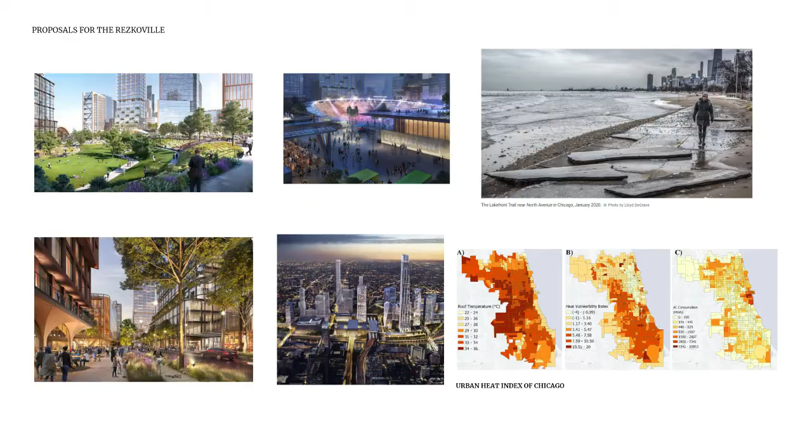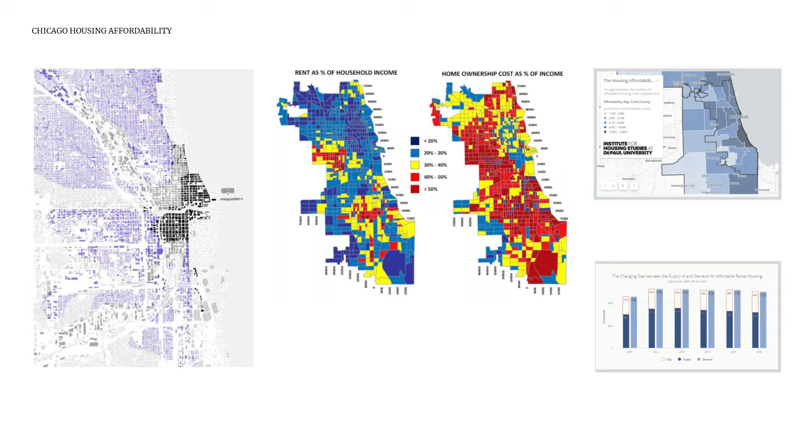The affordability gap is the gap between demand and supply of affordable houses, in which case the demand is always higher than the supply. The government says housing is affordable if a family spends no more than 30% of their income to live there. This threshold is called affordable rent burden, but 30% of 1 million is very different from 30% of 20,000.

If we line up all the families in a place by income, the median family income is what the family right in the middle of the income distribution earns. By definition, half the families earn more and half the families earn less than the median income.

Now what interested me was why not create a circular program where the solution is sustainable, affordable, and livable, and how can all these three come together?

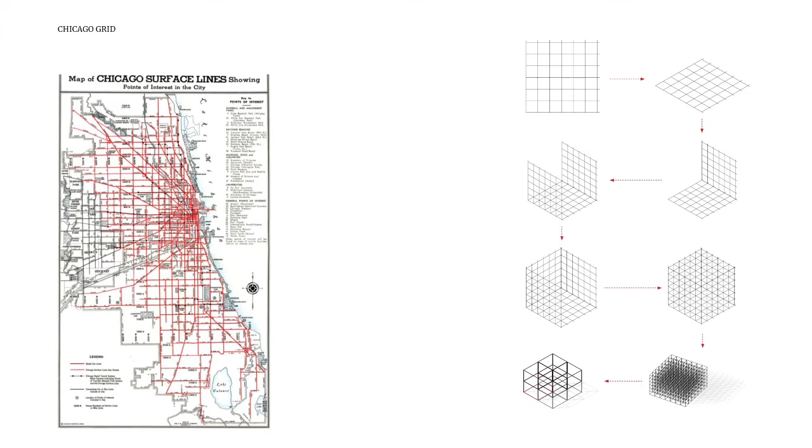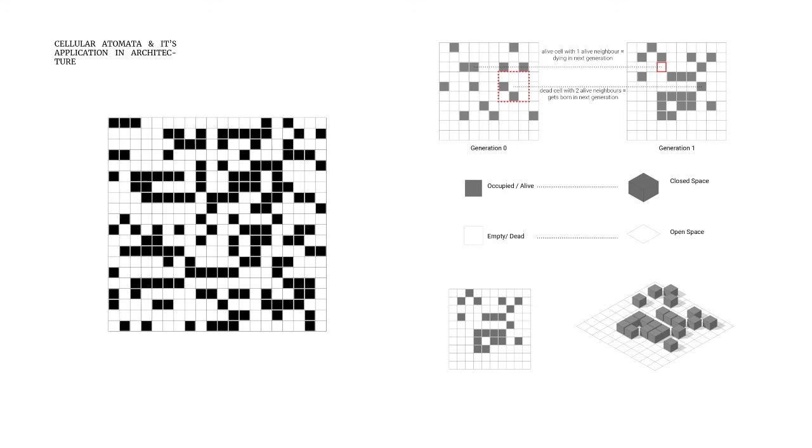Cellular automata, or CA, is a computational method that is able to simulate the process of growth or generation of simple individuals by following simple rules. A CA system consists of a grid network of cells where each individual cell has a state of being occupied or empty. It starts with an initial status of cells and is based on a set of rules which works according to the number of occupied neighbors. This 2D cellular system is then visualized in 3D as a start.

In order to form a master plan for Rezkoville, it is crucial to understand the existing structure of the city.

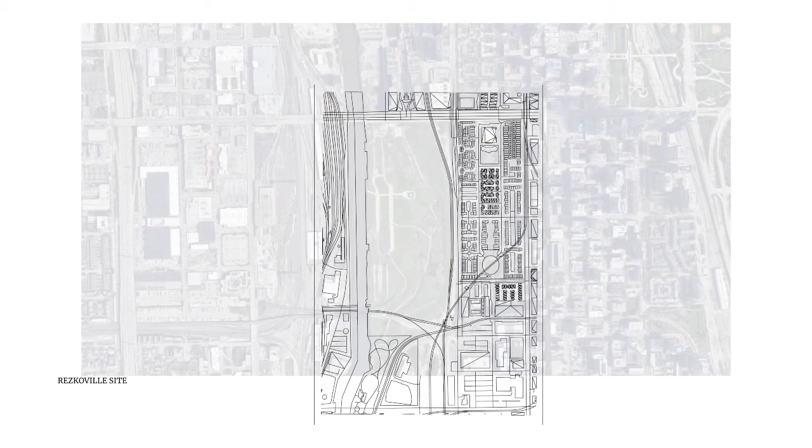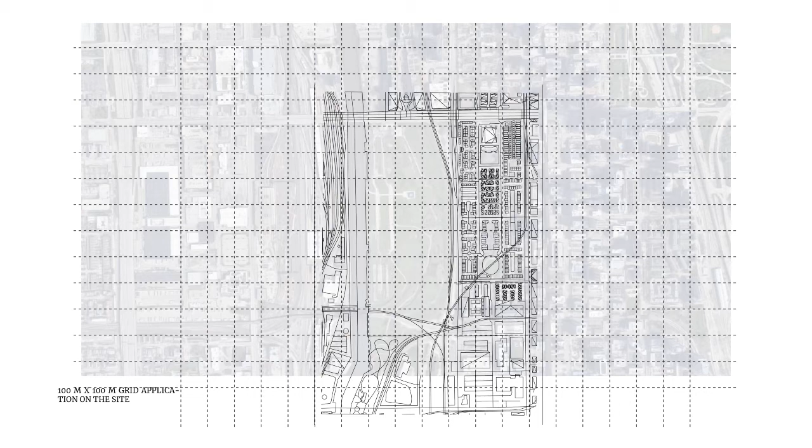The initial step was to use the original 1 mile grid of Chicago, and the intermediate grid of 100 meters was formed as the basic block for planning. By taking the 100 meter by 100 meter grid of Chicago onto the site, it helped to form these 100-meter square blocks, and 21 blocks were generated onto the site.

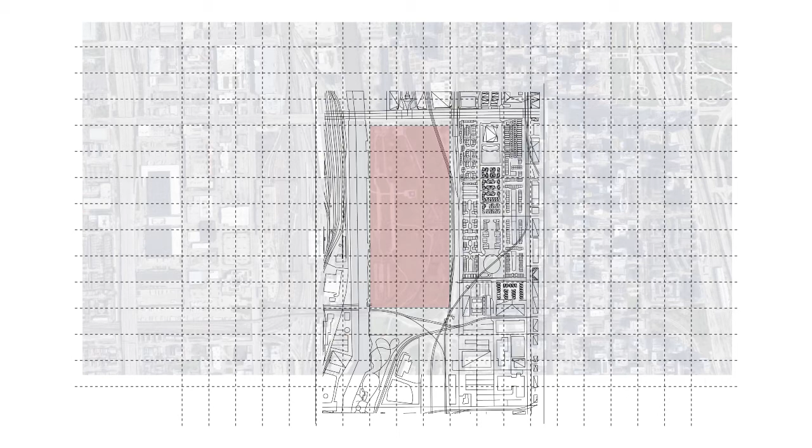Considering those 21 blocks on the site, I decided to use the first strip of 7 blocks for the intervention. As the site is quite large, it would be a challenge to find investors to construct on the whole site, so I proposed to do the development in stages. In that first strip of 7 blocks, I used the cellular automata on the first 2 blocks of 100 meters square each.

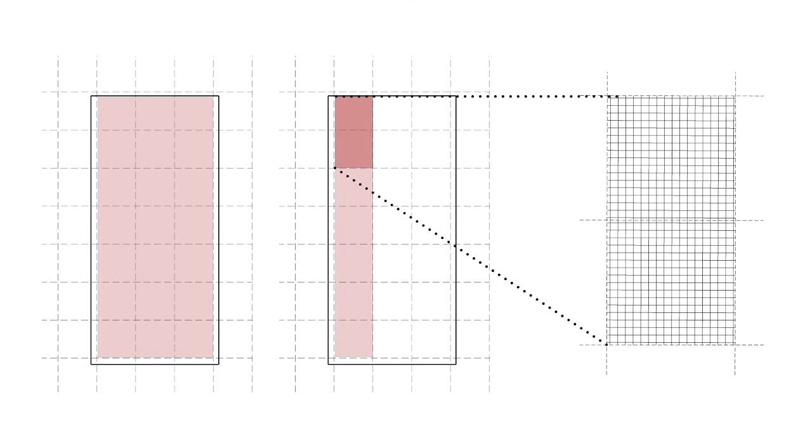The whole concept of this type of computer-generated modular structure is that we can manipulate it according to the need. In order for the modules to generate, I used a basic 6 by 6 meter base unit, which is actually a space for a single user. The modules at these stages are at time 0, but in the future can either grow or shrink, all according to the user.

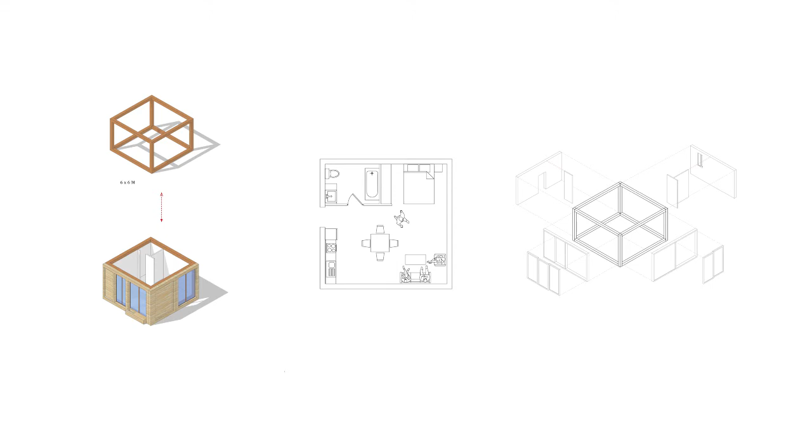Every unit here is made by a 6 by 6 meter module and is designed so that it can either grow or shrink accordingly.

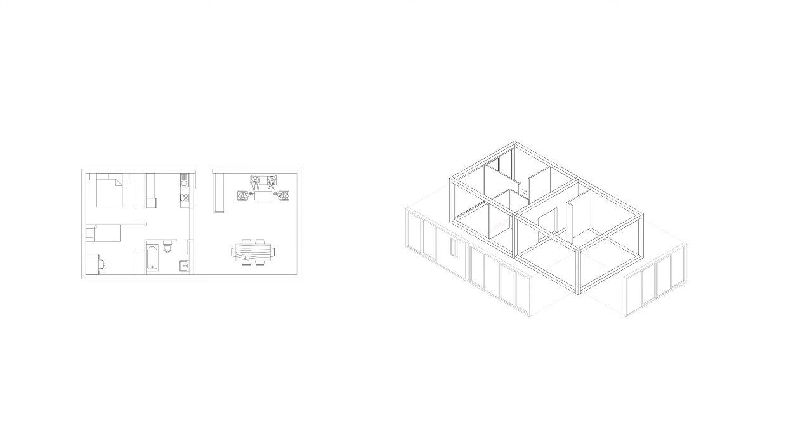The Type 1 house is made of one module, a 36 meter square space for a single user. Type 2 is made of 2 modules, a 72 meter square space. The third type is a double-story unit made of 3 modules, giving a 108 meter square space. These are only a few of the possibilities I considered, but every module can be made different and unique.

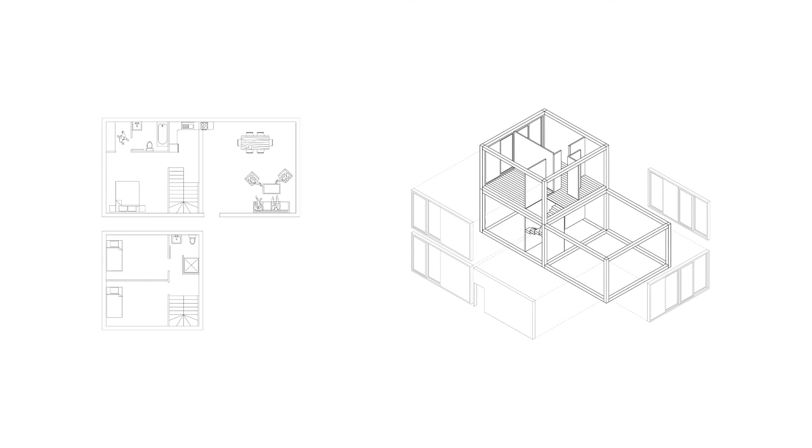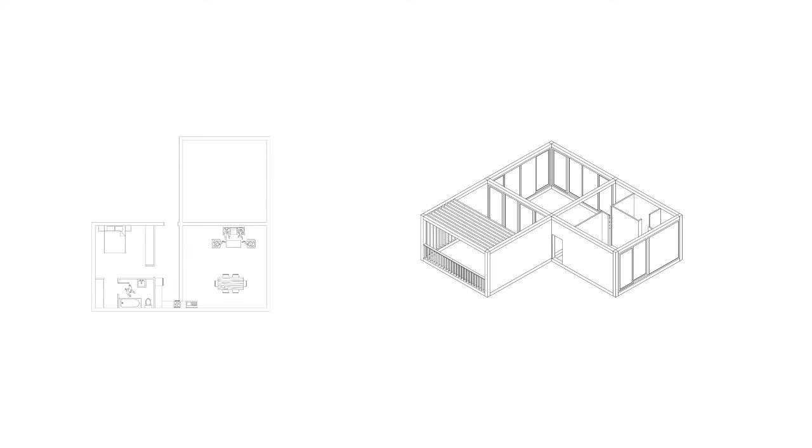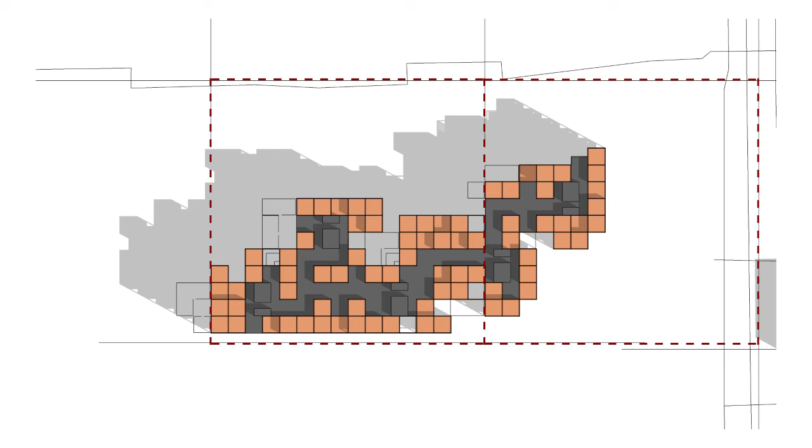Cellular automata has generated a system according to the rules, which is then manually manipulated for the structure.

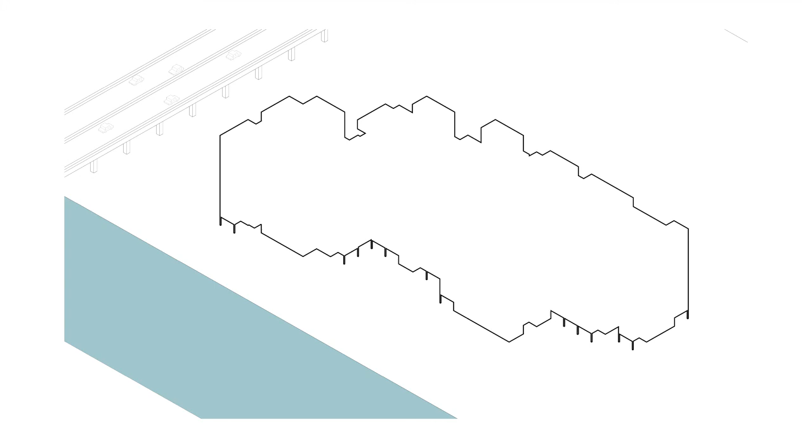In this structure, each floor has a different type of modular house as shown before, which were decided by the users, as the users only buy place according to their needs. In other words, users get to decide how much space they need for their house, ranging from a single person house to a multi-family unit, and they only pay for the place they use. In this process, the CA system helps to show the possible solutions of growth or even shrinkage.

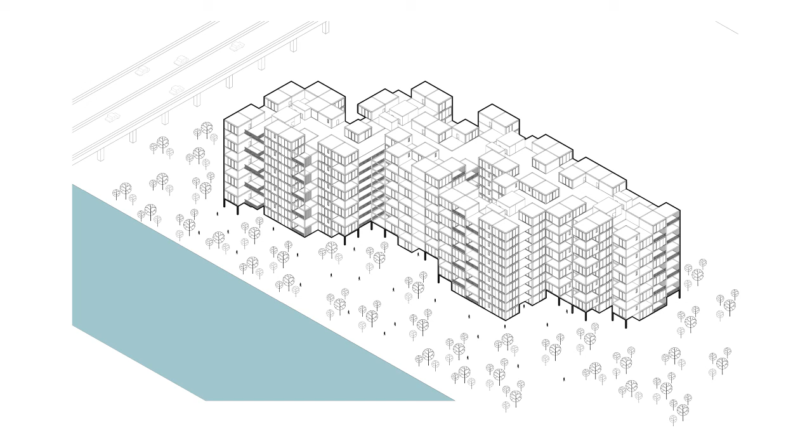Exploded axonometric views show how the cores of the structure became the hardware of the system and the modular units became their software.

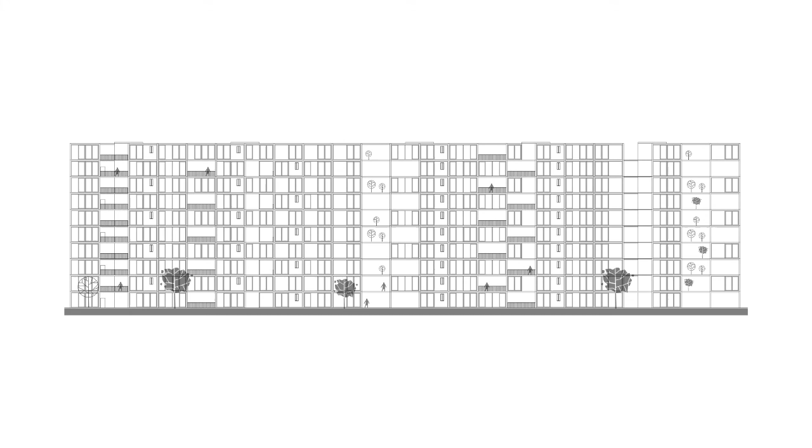Possible elevation showing the structure is breathable too, as the system generates enough space so that the existing modules could either shrink or grow depending on the user's needs. This kind of cellular automata system and manual manipulation shows that the system not only has the potential to grow horizontally, but it can grow vertically as well.